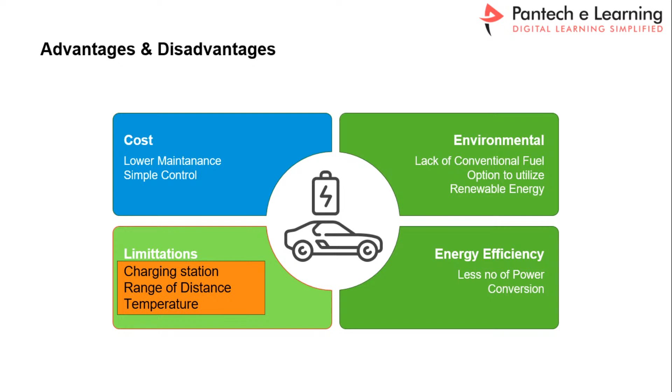So now, how can we develop the electric vehicle design? I will show you one vehicle that we have developed in our laboratory. I will guide you on how you can develop a similar kind of vehicle on your own, and Pantech will help you develop a similar EV prototype system.

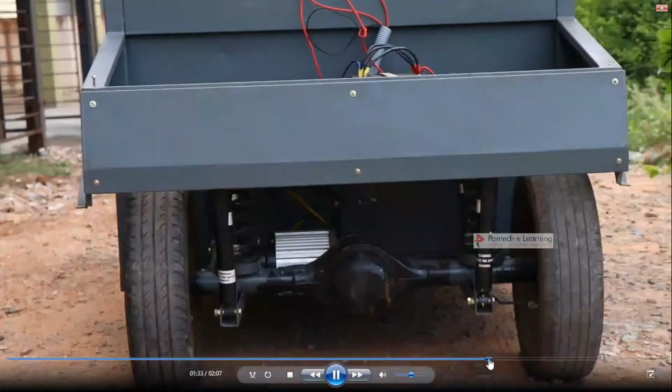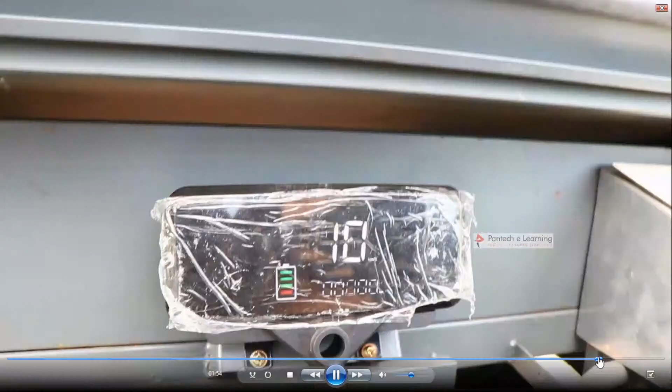This is the exact four-wheeler real-time vehicle system, and the entire vehicle operates with the help of a battery. We have completely covered the vehicle with the motor, and this vehicle has been developed by Pantech. Here you can measure the terminal voltage, distance, and battery rating - everything you can get. This is something I have for you exclusively.

If you stay with us for the next 30 days, I will tell you how you can develop a similar kind of vehicle on your own. In addition, Pantech will help you develop your own EV research laboratory in your institute, if you are interested and passionate about the EV system. For that, there are a few steps - how can you develop the EV prototype?

First, you have to develop a theoretical concept and simulate it with any software tool, then validate the parameters with the hardware system, and finally go for production. The simulation software should be capable of handling both software and hardware, so you don't have to repeat the same work multiple times - once you develop a software system, it should directly download to the hardware.

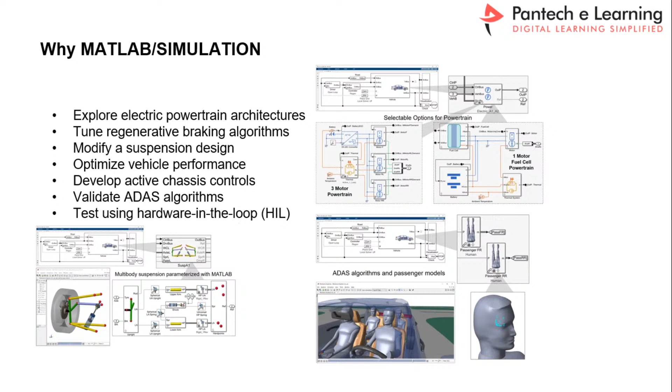For that requirement, we have a tool called Matlab. With Matlab, you can develop your entire applications - we suggest Matlab because you can develop a simulation and then utilize the same simulation for hardware systems. Recently, the Mahindra Electric Research Group released results comparing simulation results and hardware results, and both were almost 99% equal with Matlab Simulink. That's why we are suggesting Matlab software.

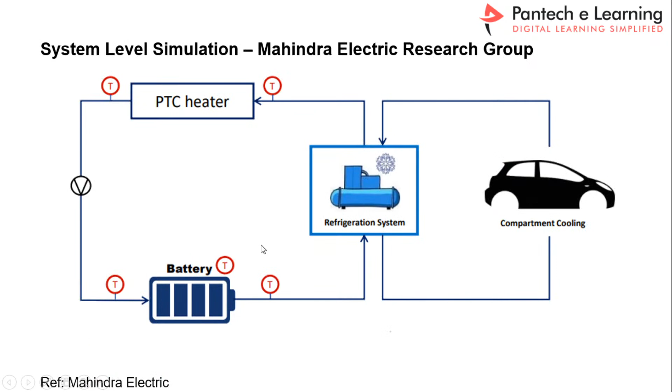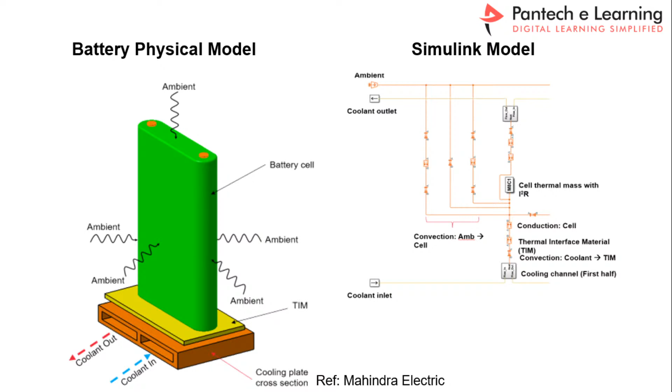Why? Because if you take a thermal management system in a particular electric vehicle, whatever you consider in real time - like ambient temperature, cell temperature, and pack temperature - everything can be incorporated into the Matlab Simulink model. That model has a thermal model, a physical model, and an electronic model, and all these models can be combined into a single platform. So we can easily evaluate whatever algorithm we develop and achieve the desired result. That's why we suggest Matlab as the perfect tool.

My objective for everyone here - about 1,000 people are here - is to give you complete insights into how you can develop this vehicle. That is our only agenda and motto for you.

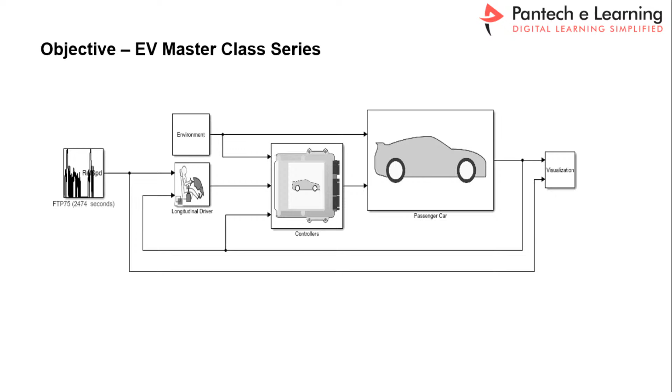So now, how can we discretize the electric vehicle technology? The very basic model is the vehicle structure. In the vehicle structure we have the wheel, vehicle body, and then the gear system. For an electric vehicle, the gear system is not mandatory, but depending on your axle system, a gear may be required to protect your motor.

In the second part, we have the battery module, motor module, and power control unit module, along with the onboard charger. These are all the second segment. In the third segment, other than these components, once you have a complete first model and second model, your prototype is ready for on-road testing. If you comply with all the standards, your vehicle is ready for the commercial market. This is the strategy we are following in our laboratory.

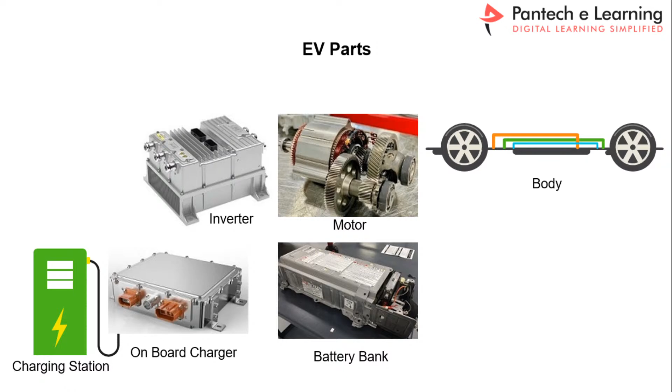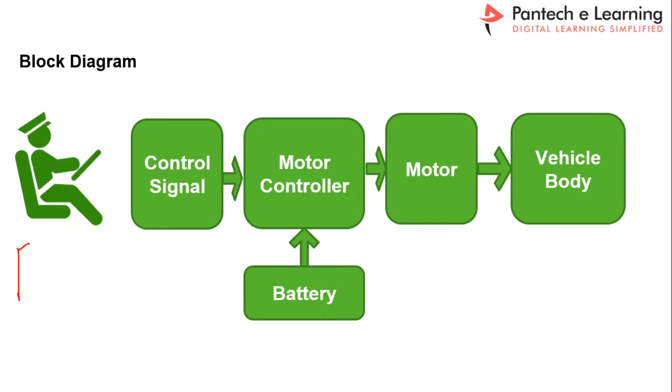So this is the system, and we can simply call this the PWM model — this is the control signal. The PWM is converted as a control for the motor controller. This entire model can be implemented with the help of any one microcontroller. I will tell you how to choose the microcontroller, and which microcontroller will be suitable for automotive applications. I have included that topic, along with the motor controller part.

The inverter may be an H-bridge inverter or a 3-leg inverter, and based on the motor type, we have to develop accordingly. Again, of course, the battery module — we need a power supply to enable the motor, to enable supplying the entire power, so we need a battery. Finally, when the motor accelerates, the vehicle will get moved.

Now let us identify the motor power calculations. Let us discuss the vehicle basics. When you keep your vehicle on a flat surface, there will be two forces. One is the push force — suppose if you want to move your vehicle from one position to another position, you should apply a force. That force we have to generate with the help of the motor.

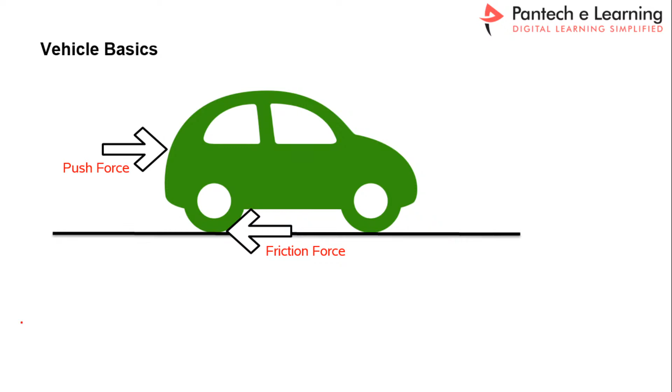That force should overcome the friction force, because due to vehicle dynamics, for any object available on a flat surface, there will be a gravitational force acting at the center of gravity. In addition, since it's a moving object, the tire mechanism will generate an opposite force. The push force is the active force, so all the opposite forces are the negative forces. Now we have to overcome these forces to move the vehicle from one position to another — we calculate all the negative forces, called the total tractive forces.

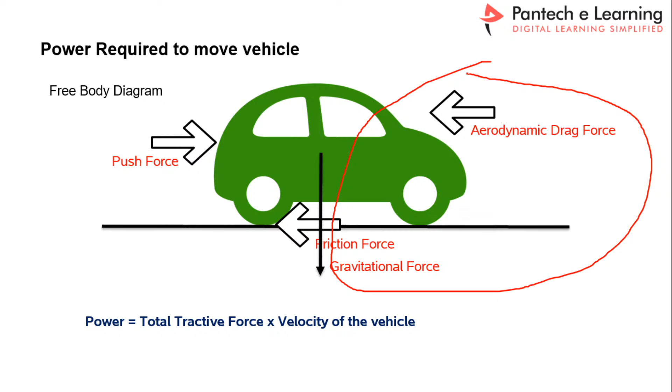So these are all the total tractive forces. If you calculate the total tractive forces, and you have more than this force with the help of the motor, then that is the motor power requirement, multiplied by the velocity of the vehicle. The velocity of the vehicle is nothing but, suppose if you are claiming that my vehicle can run up to 10 km per hour, 40 km per hour, or 100 km per hour, that is the velocity of the vehicle. So if you calculate the total opposite forces and multiply it by the velocity, then we can reach the motor power. This is the simple idea I am sharing with you.

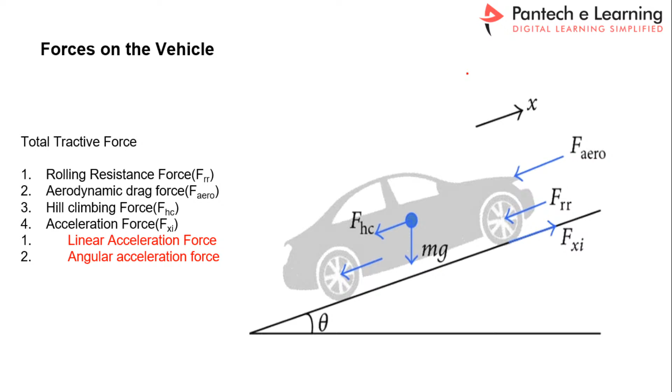So what are all the opposite forces? The total tractive force we can calculate with the help of these forces. First one is the rolling resistance force, aerodynamic drag force, and then hill climbing force. I will tell you one by one. So these are the different type of forces, right?

So what do you mean by rolling resistance force? The rolling resistance force is nothing but one kind of opposite force, an effective force due to the friction which exists whenever the tire rotates, because the tire is on the road. So whenever the tire tries to rotate from one position to another, there will be a friction force. That force is the dynamic force that can be calculated with the help of this formula: mu rr times m into g.

Here mu rr is the constant, the rolling resistance constant. We have to choose the constant value based on different types of road. So what are the types of road? Whether it is a concrete road, a rolled gravel road, an unpaved road, off road, something like that, or even a railroad. These are the types of road. Based on the road, you should choose this constant. And again the type of the tire geometry, like the number of teeth available on the tire. These are the deciding factors for considering the rolling resistance constant. This is the very first step.

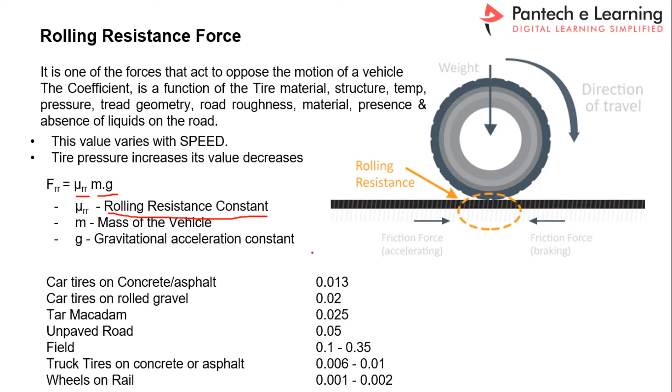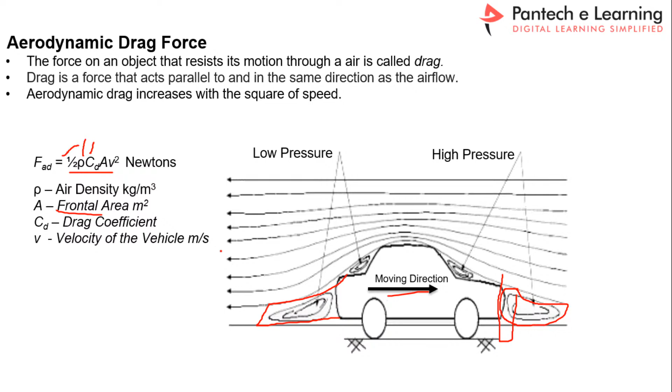We can calculate this force with the help of this formula: half rho CD A into V square. Here half is the constant, rho is the air density, also constant, and CD is the drag coefficient. This drag coefficient depends on the design of your vehicle, so you have to design your vehicle accordingly. The second thing is the frontal area, which is the dimensions of the vehicle — the length and breadth of the vehicle. Same way for the velocity, which we already know since we are going to decide the velocity. So here you can choose different types of ratings, typical ratings you can choose for your particular vehicle.

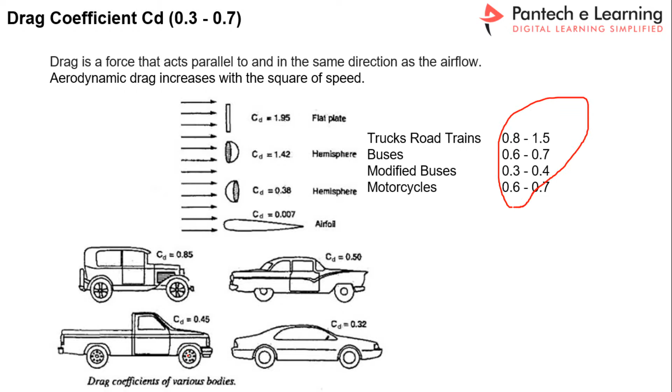Same way for the hill climbing force: our road is not constant, there will always be gradients, either upgrade or downgrade. This is the typical formula to calculate the hill climbing force: G, which is the constant, times sine theta. Theta generally will be a maximum of 20 percent. If you keep this 20 percent, we can travel on any kind of bridges or mountains as per the Indian standards.

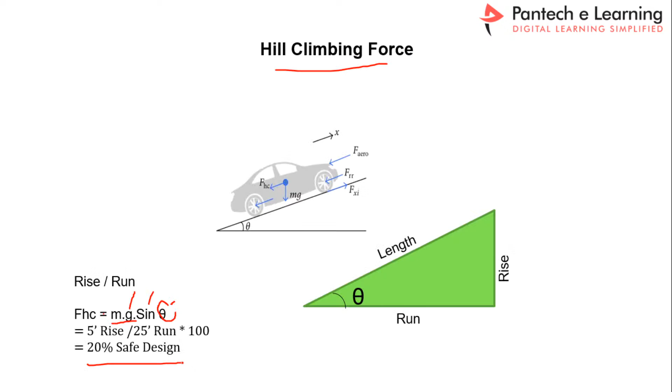Same way, one more force is called the linear acceleration force and the angular acceleration force, because the power generated by the motor gets transferred to the tire via an axle mechanism.

That will be like linear as well as angular acceleration, because the tire is only going to give you the movement. So the entire power generated by the motor should transfer to the tire. That power will be transferred in two directions: one is linear and the other is angular motion. We have to calculate this because there are a lot of parameters involved in transferring the power. Suppose if you are using a gear, the power transfer depends on your gear efficiency, same way for the linear acceleration.

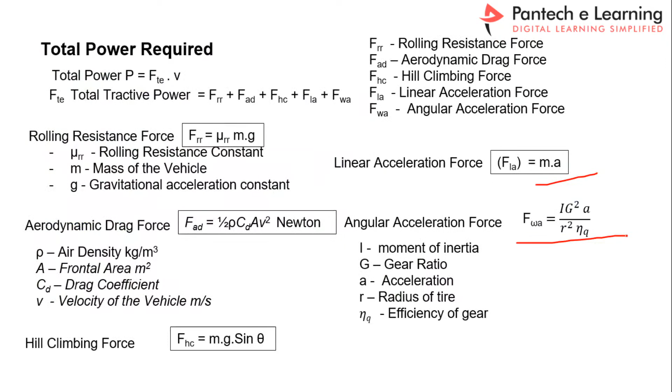Now if you take a typical data set, this is the typical data we are going to have, like the vehicle weight, width, height. So this is our typical data, and same way for the other parameters we are going to decide: rolling resistance, air density at 1.25, drag coefficient let us assume 0.3, and gravitational force which is constant. These are all assumed values, and this is the desired value. Now we have to calculate for 40 km per hour, which is our climbing value, that is our target.

Whatever the dimensions, the vehicle should travel at 40 km per hour. So the frontal area, we have to calculate this area A and then velocity V. A is nothing but width into height, that is the area, and then velocity we have calculated as 40 km per hour. So just to convert to meter per second from kilometer per hour: 40 times 1000 divided by 3600, if you multiply this, you will get 11.11 meters per second.

Now let us assume rolling resistance force and aerodynamic drag force. For understanding purposes, we are just considering these two factors alone for hill climbing and linear acceleration. Let us assume that it is ideal, which means that other force is not required. For simple understanding purposes, we are using this method. So if you calculate this one, you just apply this formula for rolling resistance and aerodynamic drag force.

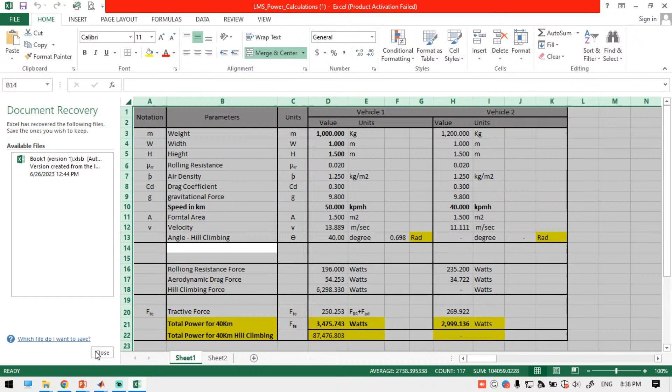See here, we are calculating using the same value. If you apply this one, let us remove that gradient value, for 40 kilometer per hour. The value requires about 2.5 kilowatt motor power. Same way, if you increase from 40 kilometer to 100 kilometer, let us calculate, the total power may be 12.5 kilowatt. Simply by increasing the speed capacity of the vehicle, you can easily understand how much motor power may be required.

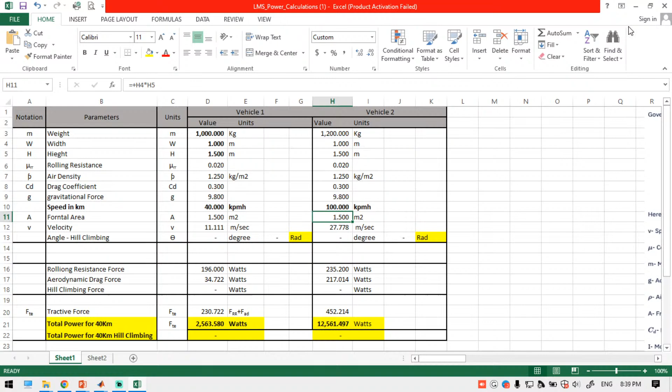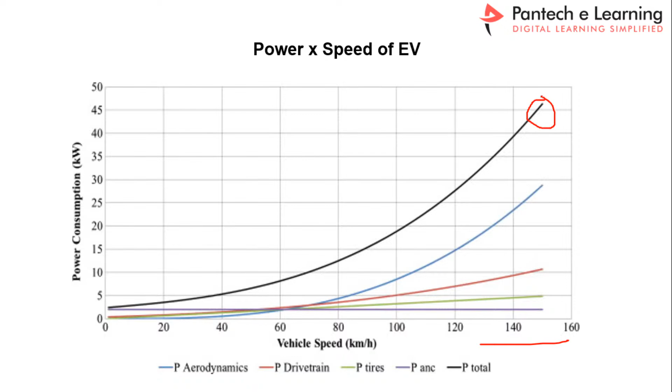Now, if you increase the motor speed, then the motor power requirement also will get increased. From this graph you can easily understand. Now let us take this sample data.

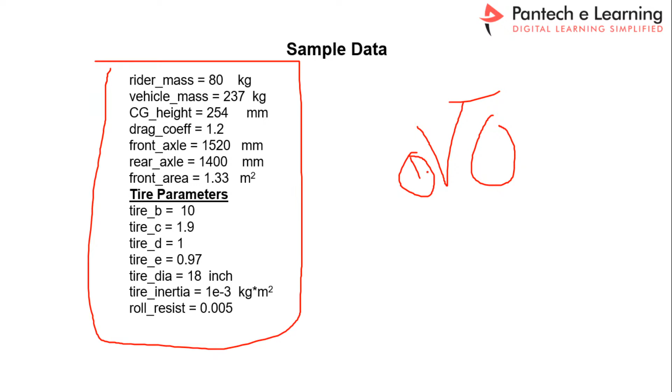Now we are going to develop a vehicle, that is the vehicle structure, basic vehicle structure. Let us assume a two-wheeler, here let us assume that this is the two-wheeler. For our understanding purposes, we are trying to develop an EV model. This is a simple vehicle we are going to model in Matlab Simulink.

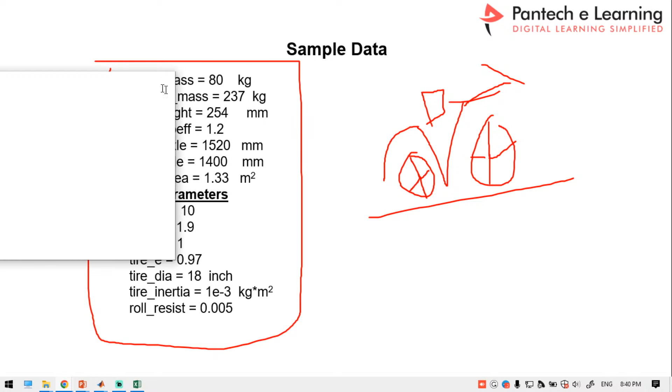I will tell you what Matlab is, and where you can download it. Just go to Google, I will share you the link. Just go to Google and search Matlab 2023 or 22, whatever version you want, you can download it.

The first command will be to download Matlab. Just download the Matlab. It's completely free, you can use it for 30 days. We are suggesting this tool because in industry everyone is using the same tool.

Just put your email ID, you can get an option to download while you are installing the software. You should include all the toolboxes into your laptop, all the toolboxes. Don't avoid any toolbox, since we are going to use all of them.

For installation, just go to YouTube, search Matlab 2022 installation. Just add 2022 installation and you will get a lot of videos. Just follow any one of the videos, then you can easily understand and reach that level.

Now I am going to share you some Matlab interesting demo. Are you ready to learn this Matlab? If you are ready, please comment in the comment box. I am ready - if you are ready, please comment in the comment box.

You can use Matlab as an online platform also, in the online also you can use it. Are you ready to learn the Matlab? If you are ready, please comment in the comment box.

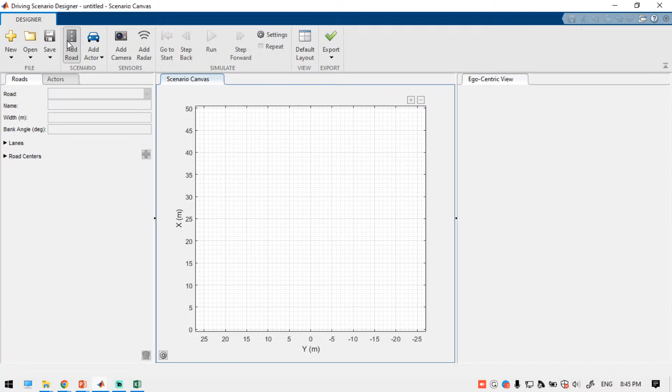Thank you participants. See here, this is the driving scenario. Here we can model the traffic signs, we can model the car, we can model all the sensors. Here I'm just trying to add the road. This is one type of experiment - I'm just trying to share you some interesting experiments, that's why I took this one.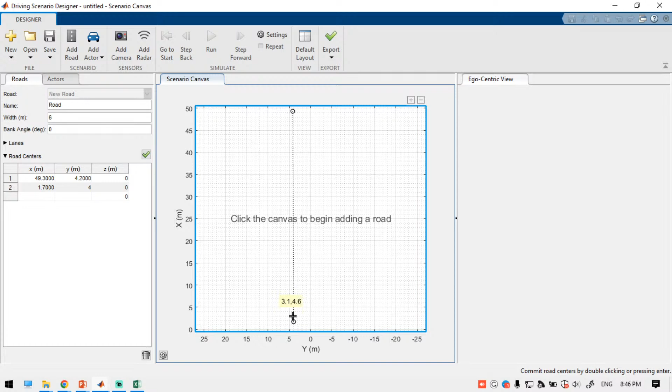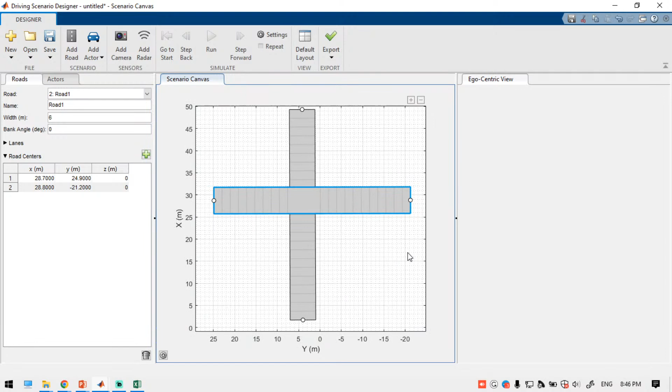This is one model, this is the one road. Same way you can add another road also. Just take this value, add road, click one button and just drag it - then your road is ready. Here you can adjust the road width and the bank angle, everything you can adjust.

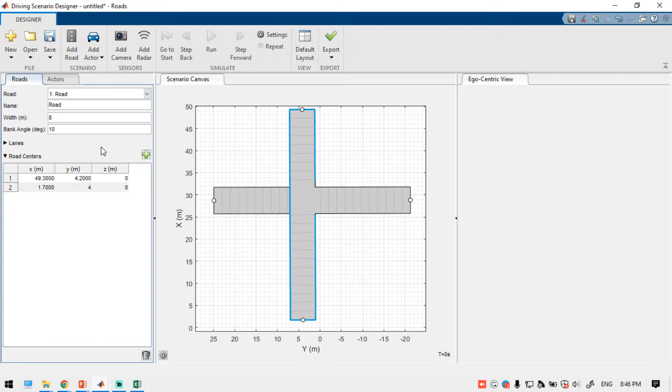If you keep this value, like if you keep 10 degrees, the road will get bended. Same way you can increase - instead of 6 meters, you can increase to 8 meters, and the value will get increased. Now you can add the vehicle.

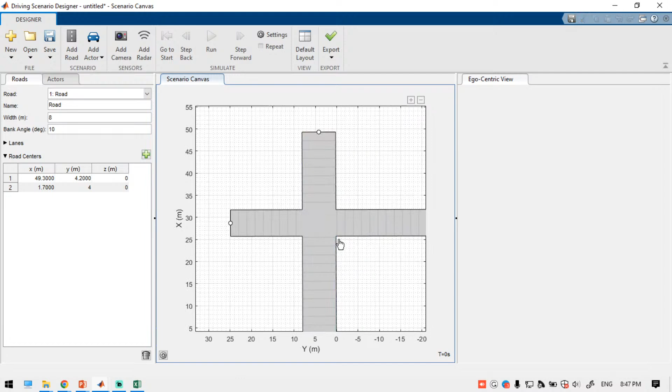Now I'm just adding the vehicle. Just keep this point here, just select the car. Now the car has been included. Here in the ego-centric view button, you can check this value.

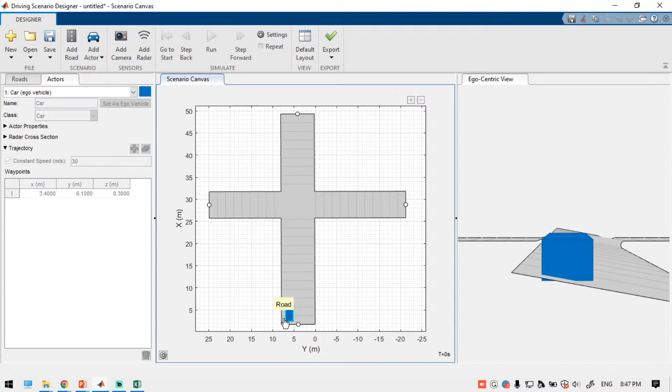Now I'm just adding the travel path, adding the waypoint - see here how my car should run for a moment on this track. Now I have included the travel path. If you run this simulation, you can simulate what is the vehicle view. Like this you can do whatever you want to implement on your own - you can develop all types of simulations.

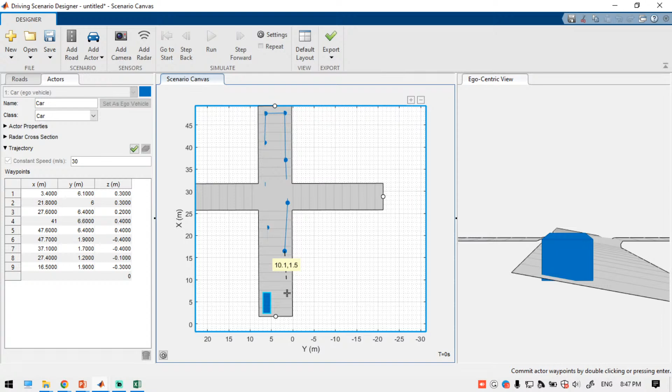That's why we are strongly recommending that Matlab is the best tool for your applications. Same way for the vehicle systems. Do you have any questions? You can post your questions.

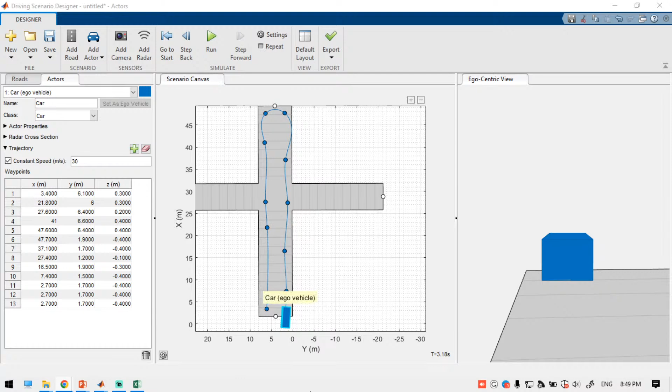So, same way we are trying to develop another simulation. I will tell you one by one, so please follow this video. After this, the video will be available for the next 5 days, so don't worry, you can follow the instructions one by one, right?

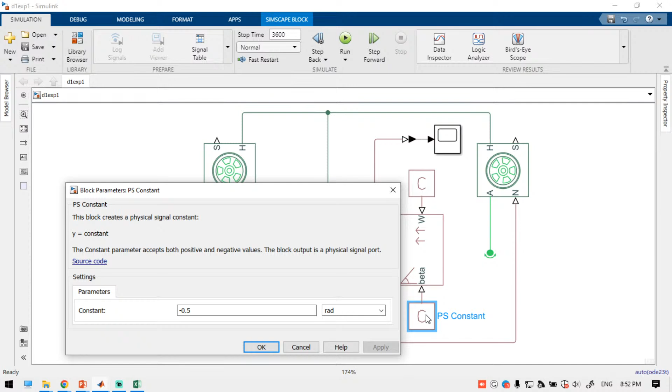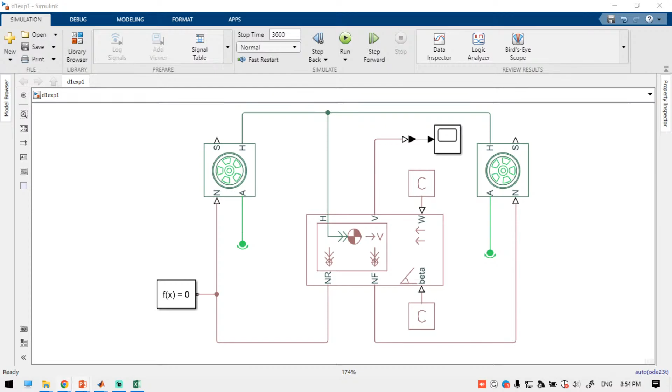So I will tell you how we can implement this data into the simulation in tomorrow's session. So try to engage with the entire class, right? So these are all the factors I will tell you.

While you design your motor, you should consider all these parameters: the vehicle type, two-wheeler, four-wheeler, or three-wheeler, and where you are going to utilize this vehicle, whether in desert area or on-road conditions or urban conditions. Same way for the configuration, vehicle configuration, whether series or parallel, what is the configuration of the vehicle, pure electric or something like that. And then speed range, torque range, how much load it can handle, and how much power it's required.

These are all the next parameters. Battery capacity will help you identify the distance to cover. And the same way for the battery voltage, this will help you calculate the total power loss and size of the electrical systems.

The second last thing is the gearbox, whether it is required or not. For hub wheel motors, the gearbox is not required. For axial motors, we may require the gearbox. And finally, the cost factor: how much will be the on-road cost for the end user? So we have to consider all these factors.

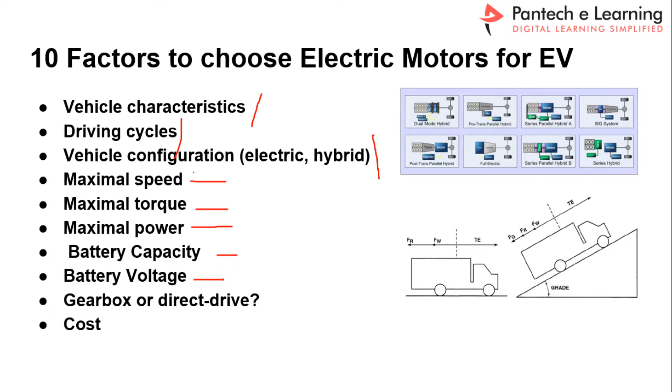We are going to consider all these factors with daily examples. In the examples we are going to consider, please try to engage with the entire session. I will give you the detailed instructions.